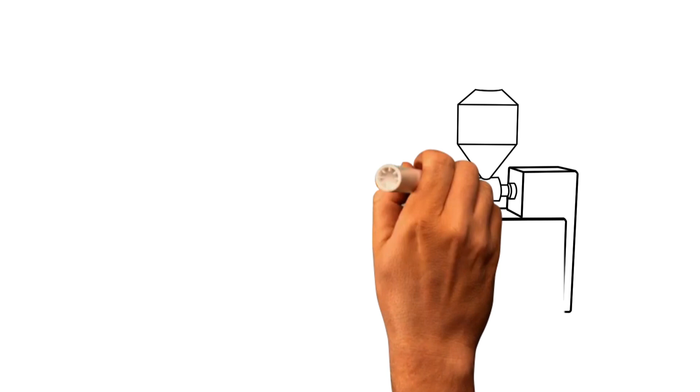This video will help you understand how plastic parts are produced through the injection molding process. The injection molding process starts with the plastic resin itself. The hopper stores the resin and keeps it dry. The temperature is controlled based on the type of resin.

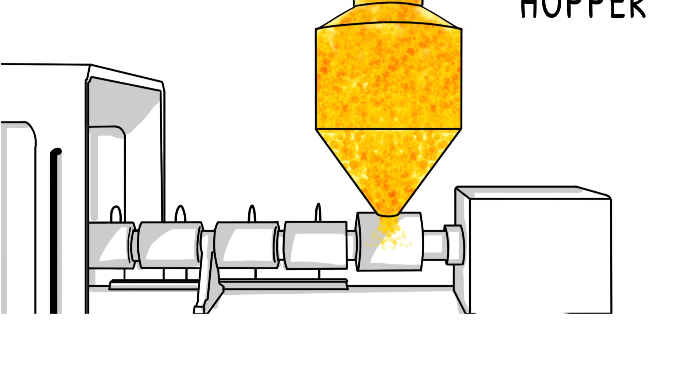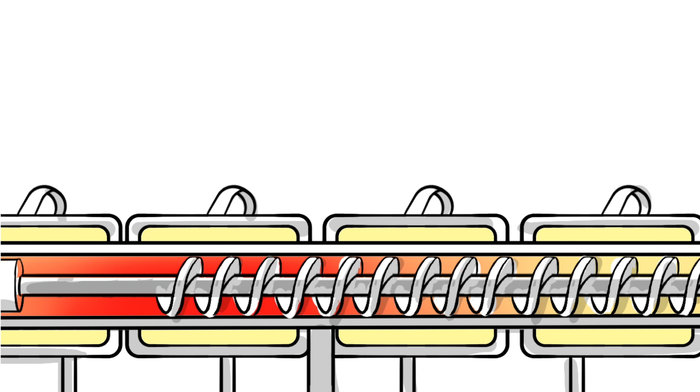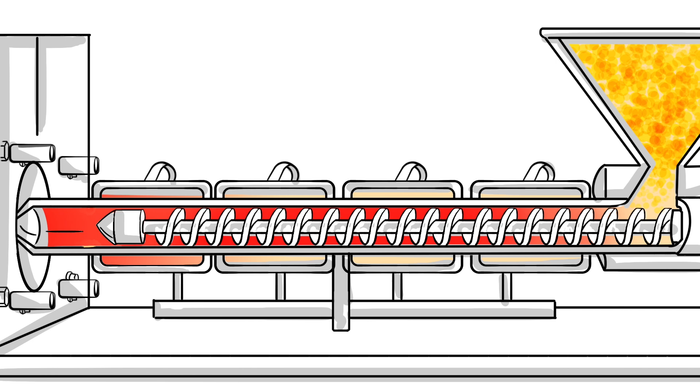The first part of the process involves moving the resin from the hopper into the heated barrel. The raw material is moved inside the heated barrel by the rotating screw. The screw has 3 zones. As the material moves closer to the nozzle end, the material starts to liquefy. The material is melted through the combination of compression inside the barrel via friction and by the heating elements that surround the barrel.

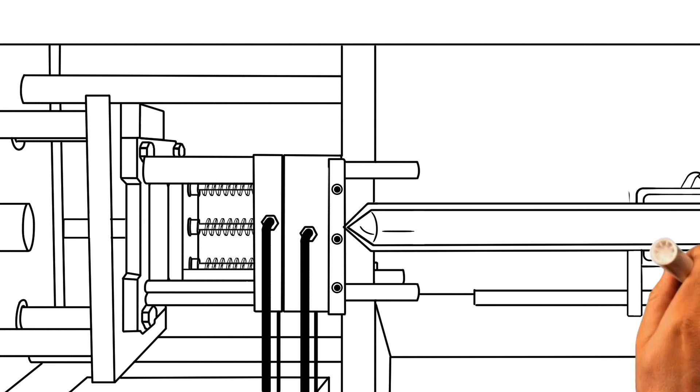When a set volume of melted material accumulates ahead of the screw, the screw stops rotating. The material in front of the screw is then injected through the nozzle into the mold cavity. This is called the fill portion of the injection molding cycle. The mold cavity is the area of the mold that forms the finished part.

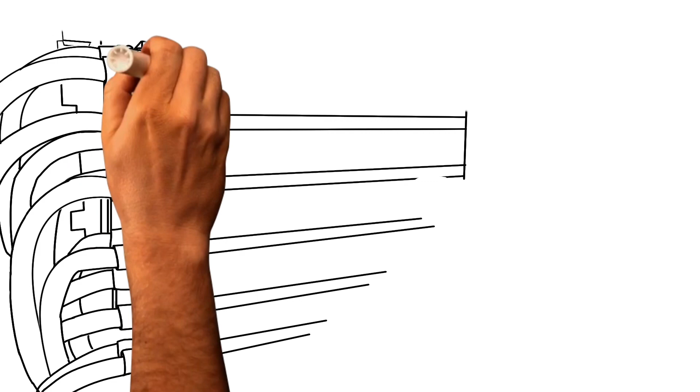The mold is only filled at 90 to 95% to begin with. Additional material is then injected into the cavity during the packing phase. The screw creates pressure until the plastic is cooled. After the mold has been packed with the remaining 5 to 10% of material, cooling water is used to help the material solidify. While cooling, the screw gets ready to fill the mold again by repeating the first portion of the process.

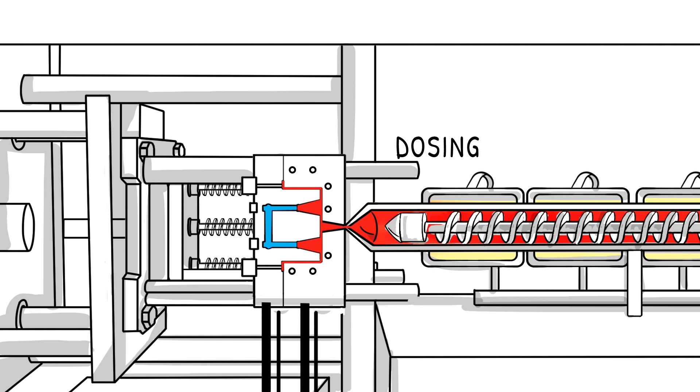Once cooled, an ejector plate helps release the finished part. The finished part is then dropped onto a conveyor belt, which transports the part into a container with the rest of the finished parts.